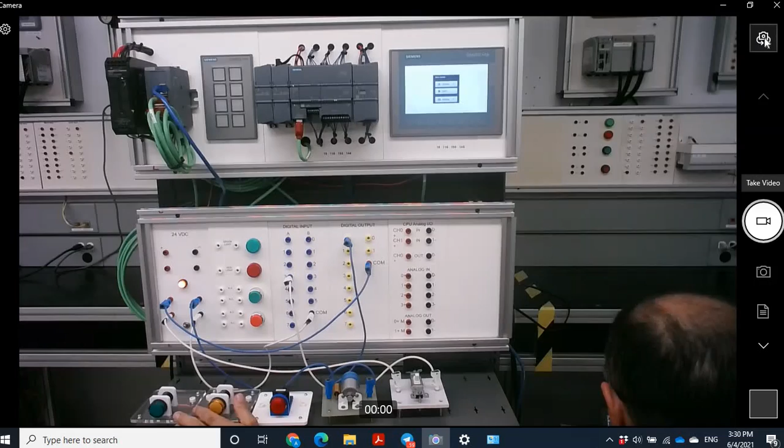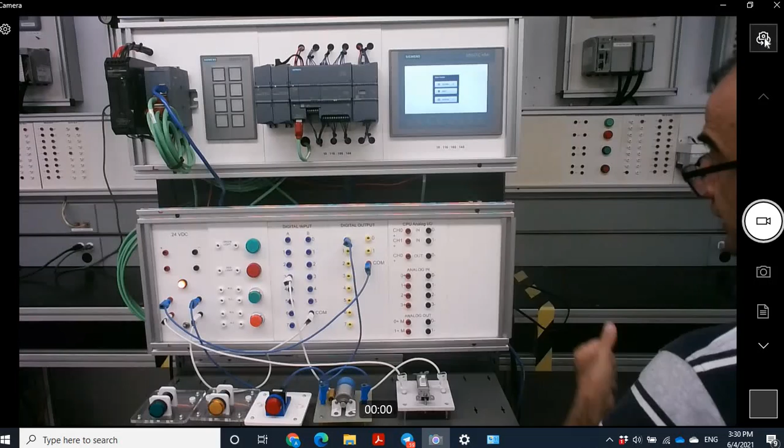And here, let me show you. Here also you see that we don't need these pilot lights anymore. I removed all the connections. We don't need this start and stop. We are going to move everything to the HMI. The only parts that still need to be connected to the PLC are the motor, instead of the heater, and also the switch that senses the temperature, so it's a sensor, and we should keep them here. We cannot replace that. So the wiring simplifies to this one. But all the communication with the PLC from the operator and also the indicators are going to be replaced by the HMI. Okay, so let's again start from scratch.

TIA, again, as administrator. Okay, create a new project. I'm not going to use the previous project, I'm going to build a new project. So let's call that heater control, and put HMI after that to indicate that it is HMI. The version, the user and everything, and then create this. We have already done that, so I'll go through it very fast to introduce the PLC just as practice, without much explanation.

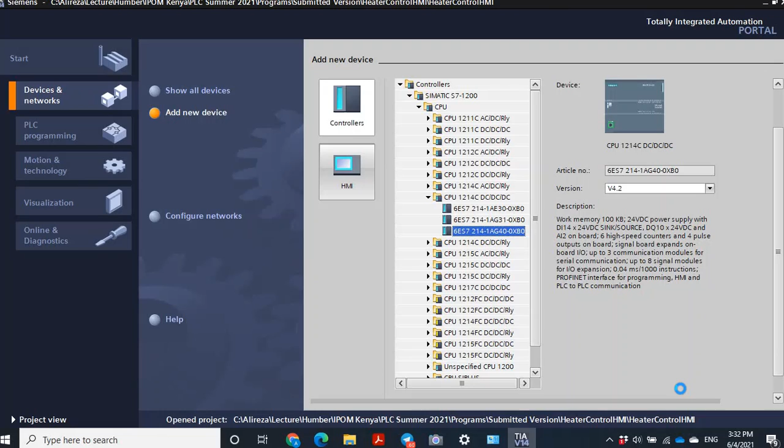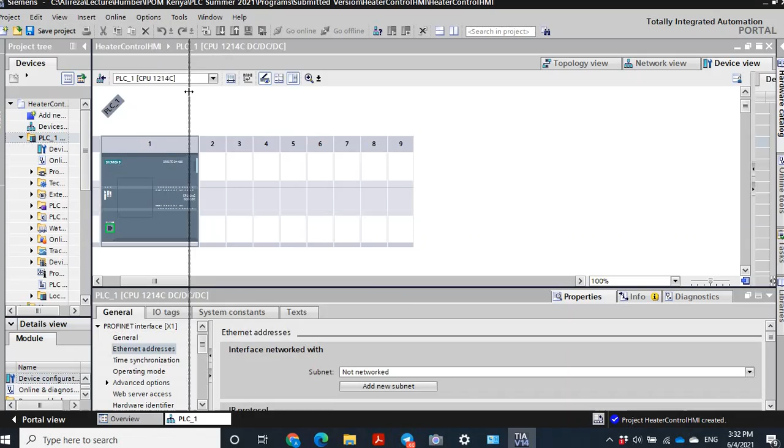Add a new device, so the CPU, then in this directory, this is the CPU that I have here, and add that. But this time we are also going to add the HMI. Let's see, when the PLC has been added, then, just a moment. Okay. We studied in lecture 2 how to add the HMI, but let me explain it again. There are two ways. One way is to use add new device. The other way is to go to the portal view. This time I return to the portal view, this familiar view.

Select the HMI. Here the display is 7 inches, it's a basic type, and the one that we have is this one. And the version of the software that I'm going to use is this one. So add that. Okay. Then, regarding the HMI, it asks whether it's going to be connected to a PLC. Yes, let's connect that to our PLC, and then click on this icon.

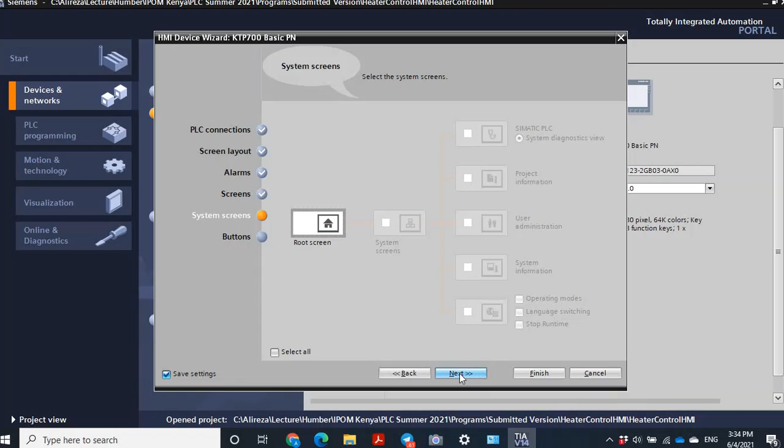Okay, then next. If there are any selections regarding the header, I recommend removing them. We don't need any header in our HMI. Also, anything regarding alarms, we don't need that. We don't need to add any further screens, so everything is in the root screen. We will practice how to add other screens to the HMI, but in this example just the root screen, so everything is fine, and then finish.

Okay, so right now we have the screen, the HMI. Let me zoom out. Okay, this is the HMI screen where we can build our HMI. The HMI that we are going to build is this HMI, so we need a start and stop push button, so we need 2 switches, and also some boxes to color, some lines just to indicate that it is a heater, and also a switch and something to switch.

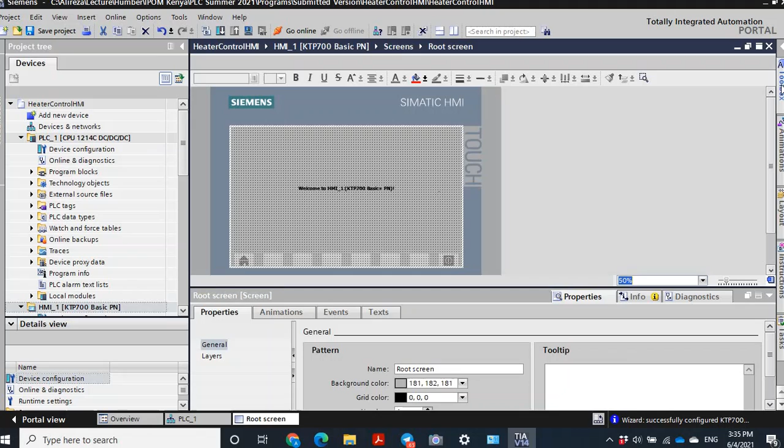All of these are built based on some basic elements. All these basic elements are available in your HMI here. Okay, here in this HMI window, if you click on the toolbox here, you see all the elements that are available. So we have these elements. These are very simple elements, but by combining them, we can build some complex elements. We're going to use these to build the elements, and also there are some basic objects and elements to build.

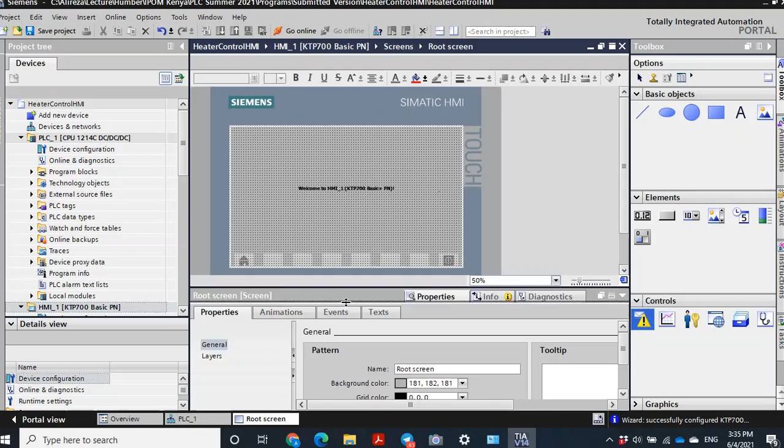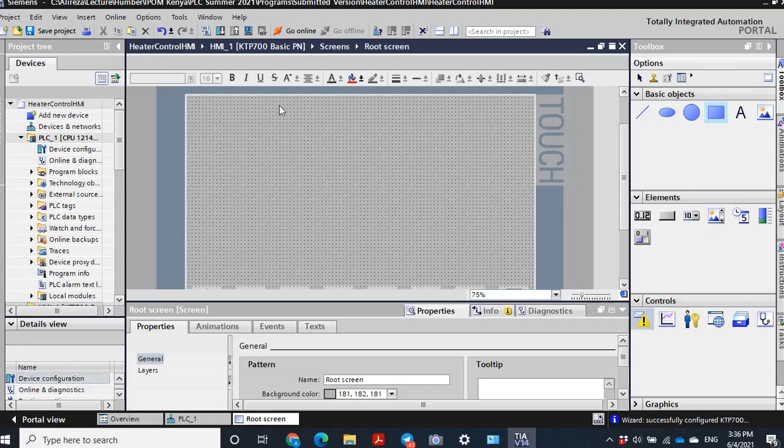Okay, so let's start with the very simple one, this one, the heater. It's just a rectangle, so I need a rectangle. Here is the rectangle. Okay, let me just increase the size a little bit. Okay, no, it's too much. Okay, this. We don't need this welcome message. You can simply select and remove that. Okay. So a rectangle, let's add a rectangle here. Okay, we can adjust the size of that.

Here there is some information regarding that, regarding the color of that, the color of the border, the color of the background, also the layout regarding the position of that, the width of that. Some other information, some of which we will use later. And also you can add some animation to that. This is something that we do. Animation is something where we can adjust the color according to whether the heater is on or off.

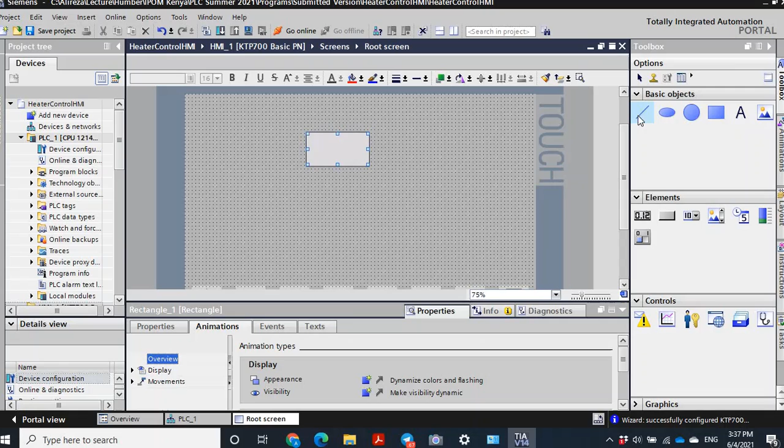Okay, so let's first have this one. Also, this is something that I built by adding some simple lines. It's too much here, but just to save time, I built a few of them. Okay, just a simple line here, and another line from here to here, for example, another line from here to here, and then one from here to here, another one from here to here, and one more from here. And let me just skip to making all the others. You can add any number that you prefer, and try to wrap that up at this point.

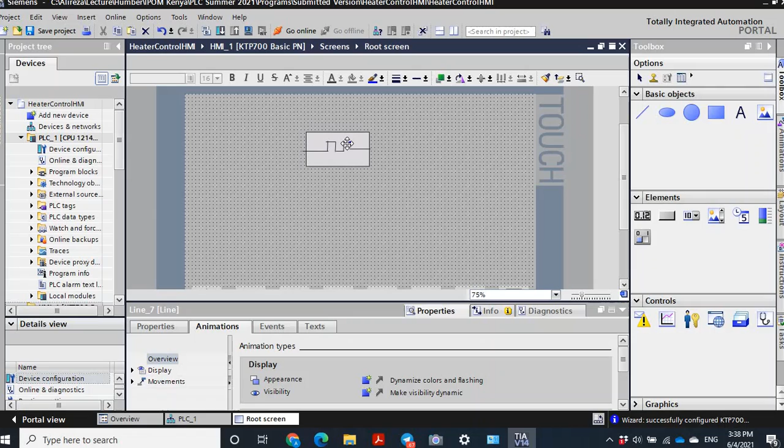Okay, this, and then have a line here, from here to here, and let me increase the size of this one. Okay, and then move all of them a little bit to the right. Okay, this is the heater. It's not that beautiful, I know. You can make it more beautiful, and if I have time I will do that at the end of this session. But anyway, we can change the size of that, for example, in the properties. Let me show you.

In the appearance, you can change the thickness, the width of that. Okay, let me add, for example, like this, or the color of that, the layout regarding the width of that. Let me decrease that, and also I can move the position. You can see here the position is changing, so make it more beautiful. Okay, that's good. And for example, this one also, let me change the appearance of that, increase the size, and also it seems that it's not that straight.

So this is the distance in the x dimension. This is the x dimension, and this is the y dimension. This is axis y, and this is axis x. The value is 1, but it's supposed to be 0 because it's going to be straight. So let me just make it 0, and you see it becomes very beautiful. And then let me decrease the size of that, and also move that downward.

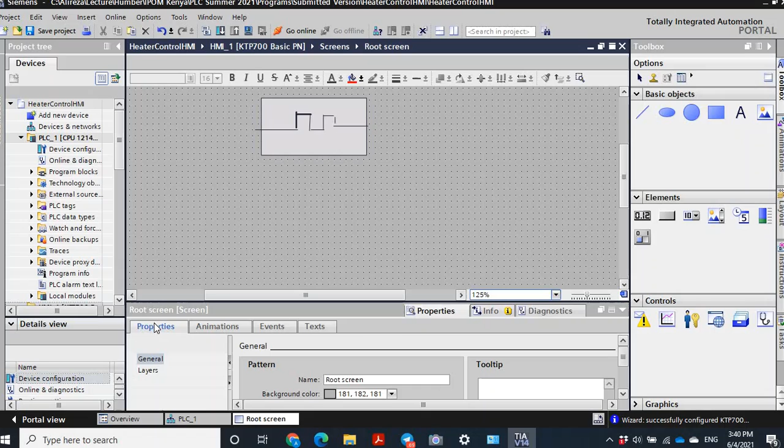Okay, so move that. Sorry, change the position from Y. Okay, you see, that's more beautiful. So you see that you can make it more beautiful. I skip this part, and if you have enough time at the end of this session, I make it more beautiful. But this works for us sufficiently.

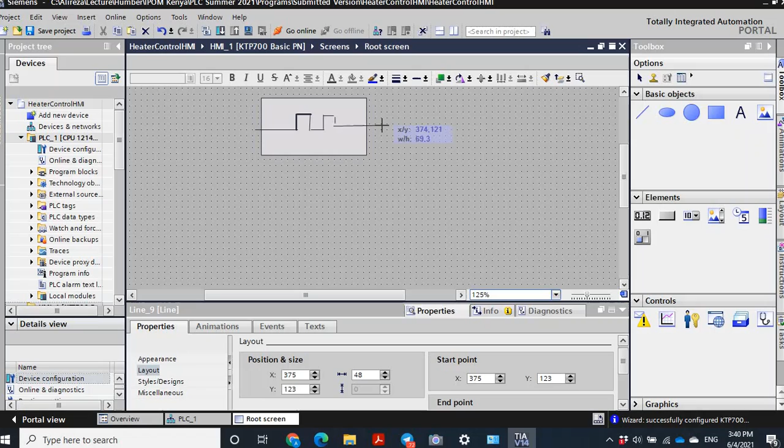This shows that it is the heater. Just change the style of this one, increase this one, and then also let me check the layout of that. Yeah, 0, so it is quite straight. A little bit to left. That's good. And this one also, just this one.

Again, the appearance of that, increase the width of that, make it more thick, and then the position from the X, let's move that a little bit to left. And you can also increase the size of that, okay? And move that to left. That's good, beautiful. Okay, so this is our heater.

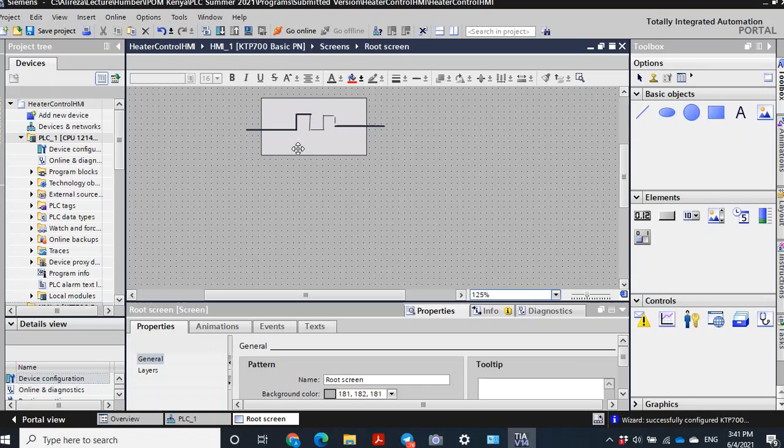The heater is going to turn on and off to indicate whether the heater is on and off. So to do that, you can change the color of that, depending on the state. According to the original program, if the heater is off, the color should be green, and if the heater is on, the color should be red. So instead of the red and green pilot lights, we are going to use the HMI. So let me change this in the HMI.

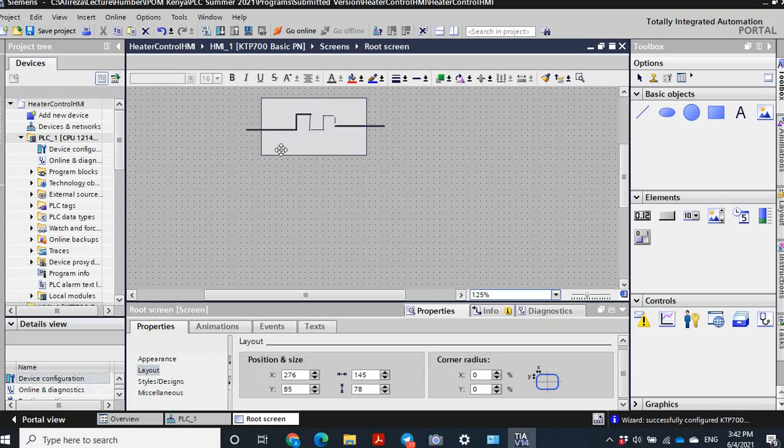How to do that? Okay. Here we have an animation. For this box, first select the rectangle, and here we have the animation. We can change the color of that in this animation. But before doing that, we need to build the program. We need to have this program, and when we have this program, we have these variables, and when we have these variables, we can change the color according to these variables.

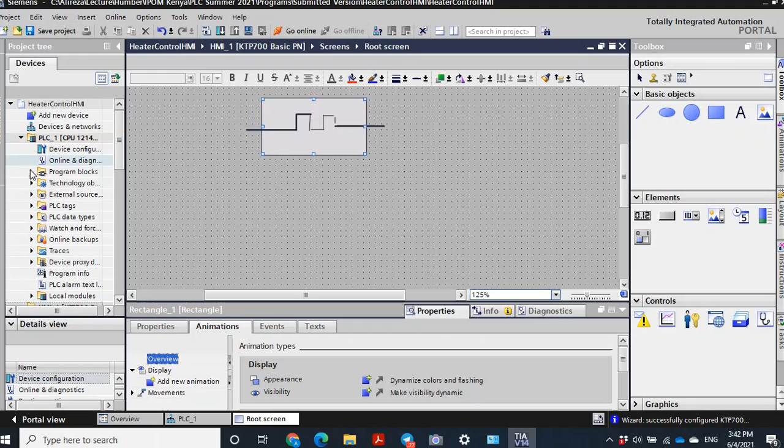So before continuing the HMI and the other parts, let's first build this program and then use the variable addresses and the tag numbers of these PLC programs in our HMI to turn on and off or change the color of them. So let's go back to the program block, the main, and simply build the program. We have not yet established the connection between the PLC and the software completely. I can do that later. Just build the program, and then let's set up the configuration.

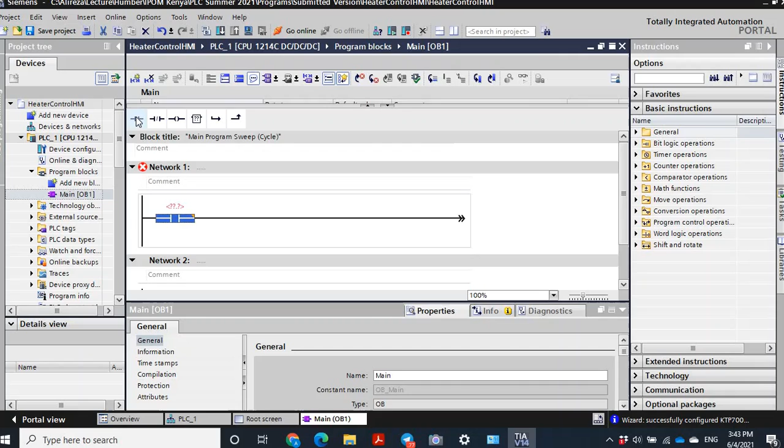So we need here 2, 3, okay, and one output, and here similarly we need a branch with this one. In the previous part we just dragged that to this point. This time I'm going to use this option. If you click on that, you see that it connects to the closest position upward. So here, okay, regarding the inputs,

in the original program we had input number 1 and 0 because there were 2 physical hardware switches that should be connected to the PLC through the inputs. But this time we're going to use the HMI as the push button for the start and stop. So we don't need to use inputs because these are not devices outside of the control system to be connected. So instead of that, we use the bit memory M1.0 and M1.1 for start and stop.

So let me use the same as it was here, 1.0 and 1.1 for start and stop. Okay, so it should be M1.0, and change this to stop. See, there's not any input. You can change, and here it is M1.1, and this is supposed to be start. Start. And this is for overheat.

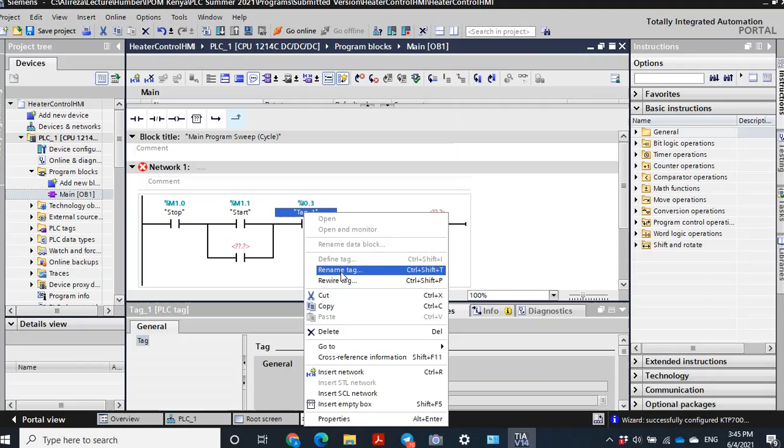Overheat is a sensor connected to the input 0.3. So we should keep that. And then this should be overheat. Okay. And this is the heater. Again, we have a physical device outside, Q0.0, and then this would be heater. Okay, and again this is heater. Okay, so the program is ready. This is the only program that we need.

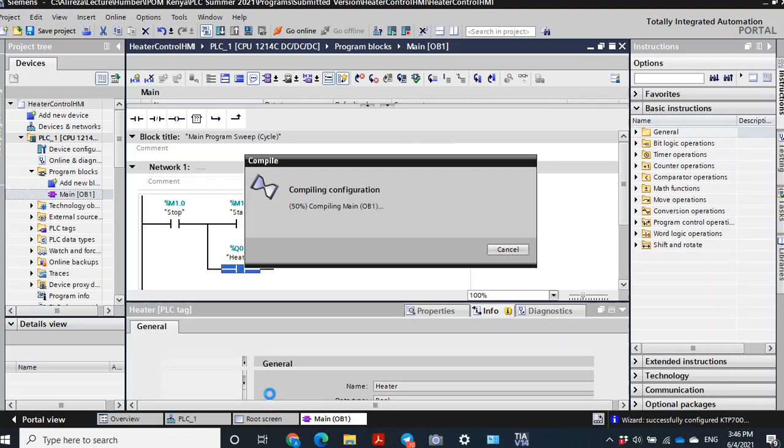Let me first compile that to be sure there's not any error. Okay, see here, there's not any error. So then let's download. This time it asks which PLC, and then I can set up the communication with the PLC. Okay, this is the IP. This is the PLC that right now I have in my software.

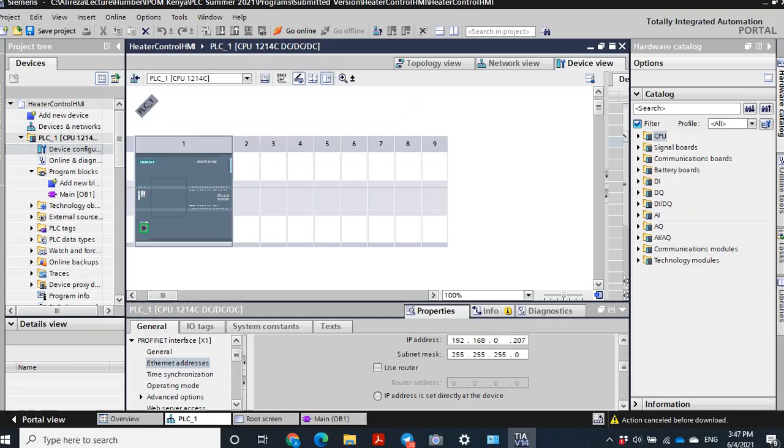You see that the address is not 207 because I didn't change that. So let me go back and configure the device from here. If you double click on this device configuration, this opens, and then if you double click on the PLC, the properties of the PLC open. Under the Profinet Ethernet address, go down to see, okay, this was the one that we had, 207. It should be 207. Okay, apply that, and then again try to download.

You see that this time the address is as it is given in the software, and then we can search for any available or compatible devices. Okay, yeah, this is the PLC that we have in the trainer. The address is this one, and then we can continue, select that. It has already been selected, so download that, load that.

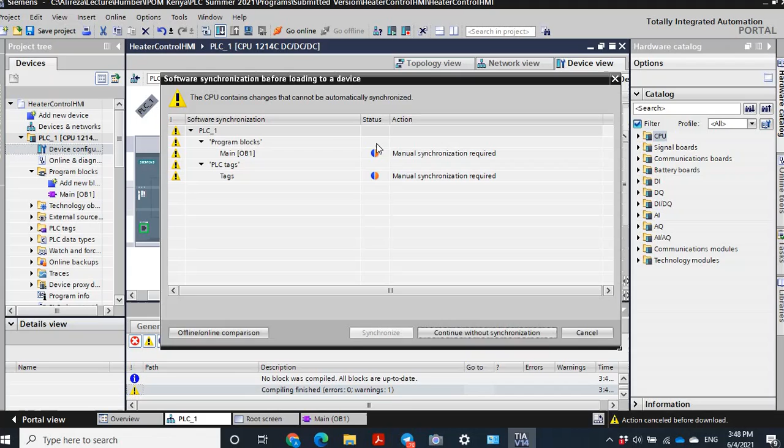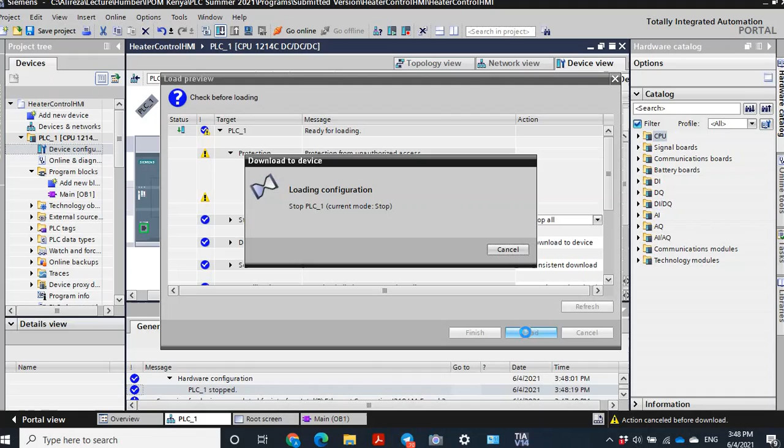Okay, again, it reached this point, continue without synchronization. And then again, it should be in the stop mode to change the program. So stop that, because the PLC right now is in the run mode. And then load. Okay, and then start that. Okay, so the program is there, but there's not any indicator there. And we should continue right now that the program is ready.

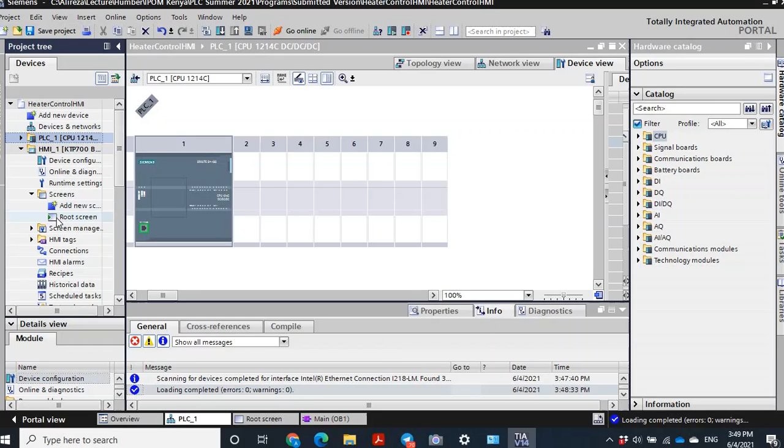We have all the addresses that we need in the HMI, so we can go back to the HMI. Please notice the HMI. So this is for the PLC. Let me close these branches for the PLC, and instead the HMI. Under HMI, under the screens, the root screen. Okay, double click on that. And this is the screen that you just put.

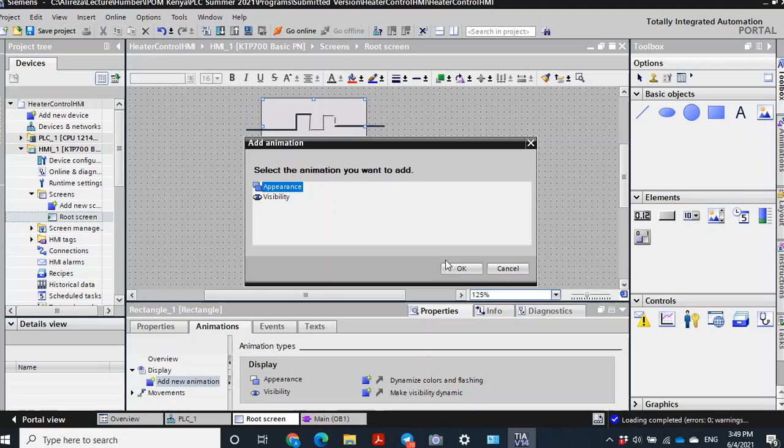Okay, so select the rectangle. And then we can go to the animation, and here we have display, and add a new animation. Something that we want is to change the appearance of that, let's say the color of that. Visibility is whether it will be visible or invisible, but we don't want to make it invisible. We just want to change the color, so click on appearance. Then let me drag it up so you can see more detail.

The tag: it's going to change the appearance according to the heater. So when you click here, it asks you the tag or the addresses under the PLC. Under the PLC, find the PLC tags. If you click on this and the default tags, then you see, increase the size of that, all the tags that we have already defined in our PLC. In the PLC, we have input 3 for the overheat, Q0.0 for the heater, and these two memory bits that we are going to use as start and stop.

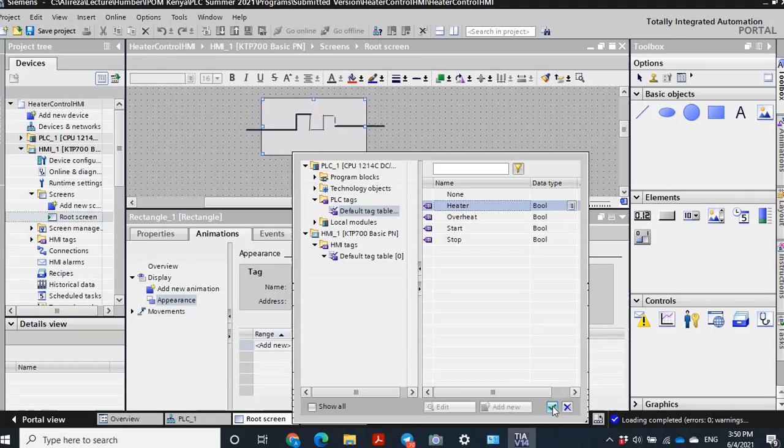So the color of this indicator for the heater is going to change according to the state of the heater command. If the heater command is 1, it's supposed to be red. If it is 0, it's supposed to be green. So let's select that. When you select that, it appears here. Then here you can add a condition. Here, the heater, the state of that, 0.

When the command of the heater Q0.0 is 0, it means that the heater is off. In that case, you remember that the color is supposed to be green. So let me select green for that. Then add new, and by default, because heater is just a bit, it has just two states, state 0 and state 1, and it automatically shows us state 1, but you can also change that if you have other types of variables.

Of course, for this one you have just state 0 and state 1, and when the heater is 1, it means that we have the command for the heater to be on, and in that case, remember that the color should be red. So let's select the color to be red.

Okay, good. So it means that the background color of this box changes from green to red depending on whether the heater is on or off. Okay, we will continue with the rest.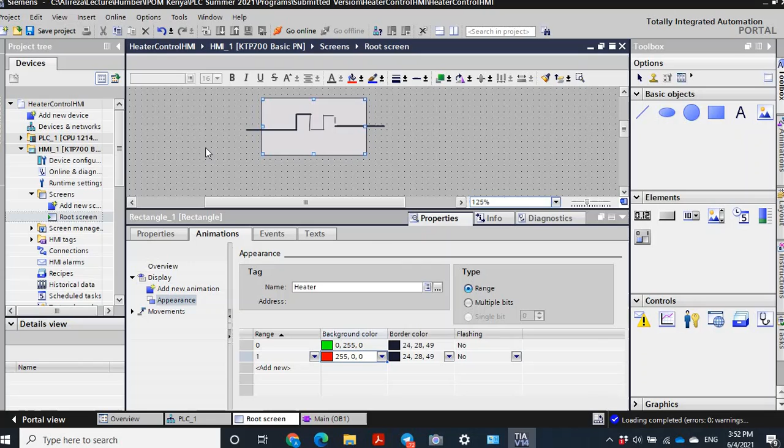We need a start and a stop. So let me add the start and stop. For the start and stop, here we have some elements. The one that we need is this one, button. It is something that we can use as a button. So let me bring one here, and one more here, one for start and the other for stop.

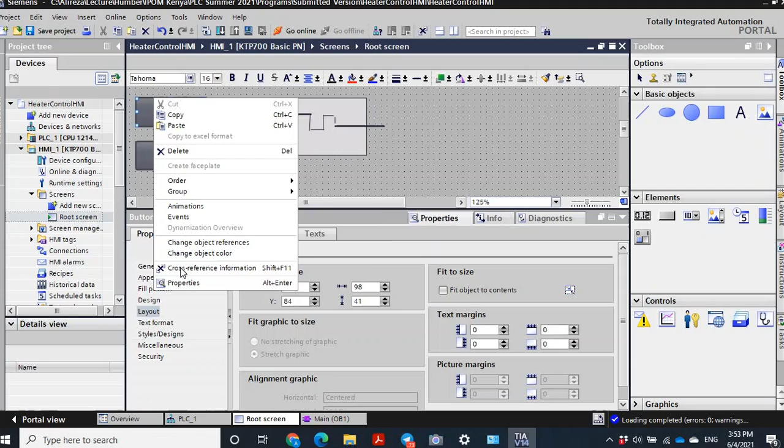Again, you can change the properties of that. Double click; if the properties appear, that's fine. If it doesn't appear, just right click and then properties. Okay, so it appears. The text that we want to have here is start and stop. So first, this is supposed to be a start.

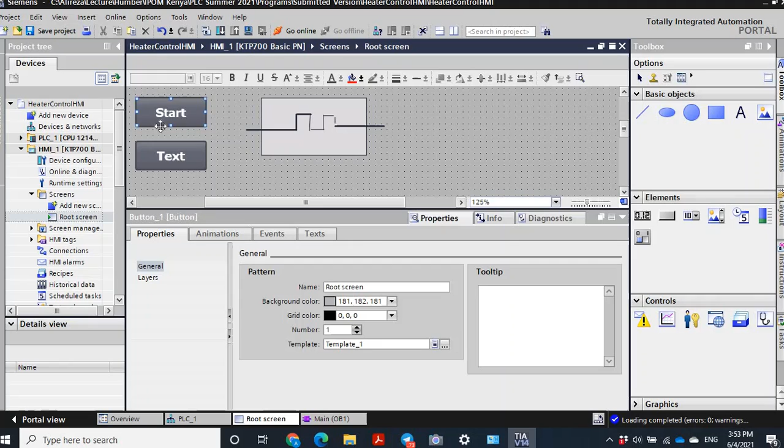But instead of the input, that memory address is going to change. So memory address M1.1 is going to change when we press this push button. It's supposed to become 1, and when we release that, it's supposed to become 0. This is something that we can build here by using the event. Select press, and then add function.

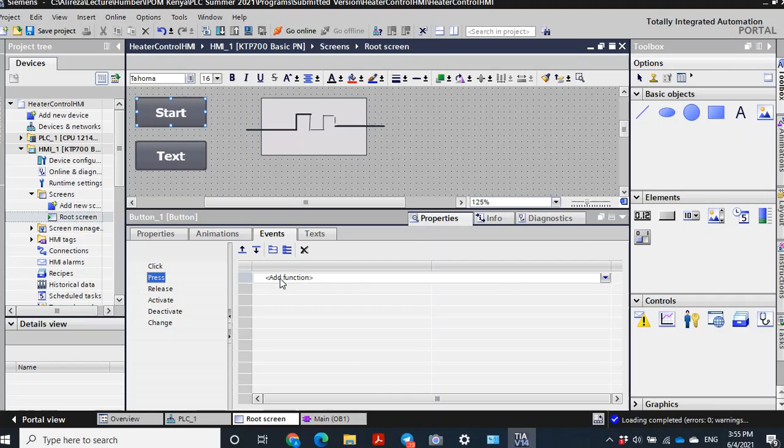Something that we expect is this edit bits. There are many options. We are not going to go through all the details; we'll work with some of them during this program, but not for this specific one. So here, set the bit. When we press that, we expect that we set the bit. Which bit?

If you click on that, it opens. By default, it shows you the tags in the HMI, but we don't have that tag in the HMI yet. The one that we are looking for is this start, M1.1. So select that. It means that when you press this start, the start tag M1.1 sets to 1.

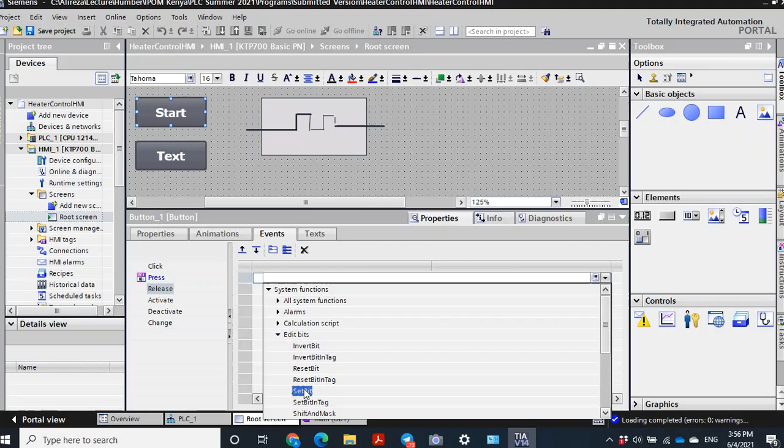And then when you release that, the push button state should return to 0. So again, add the function, but this time the function that we need is reset. Under edit bits, the reset bit. Click on reset bit, and then here again, select the start.

So it means that when you push this button in the HMI, memory M1.1 becomes 1, and when you release it, it becomes 0. It is similar to a physical push button. When you push that, the state of this input becomes 1, so the state of start becomes 1. When you release it, it becomes 0. That is exactly the function of a hardwired push button. Similarly, here we have it for the HMI push button.

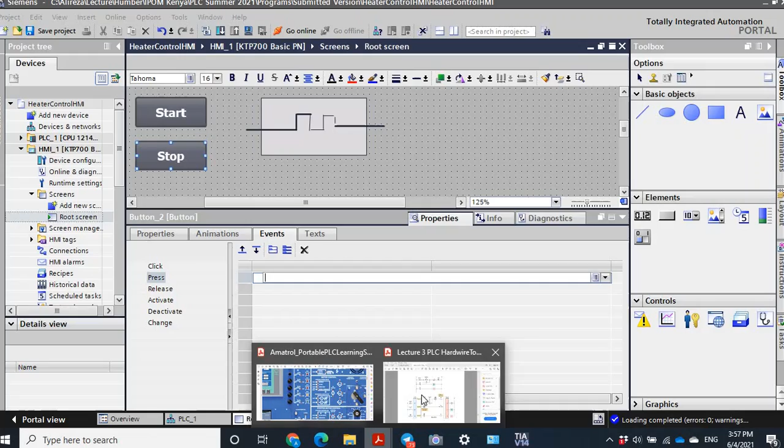And this is something that we expect from the HMI push button. So this time, when we push that, we expect to reset which bit? The bit that represents, sorry, represents the stop. In the PLC tags, the stop, okay? Increase the size so you can see, okay, yeah.

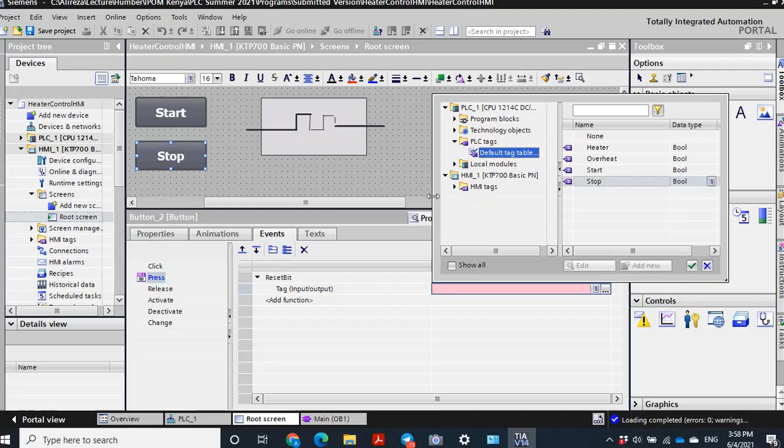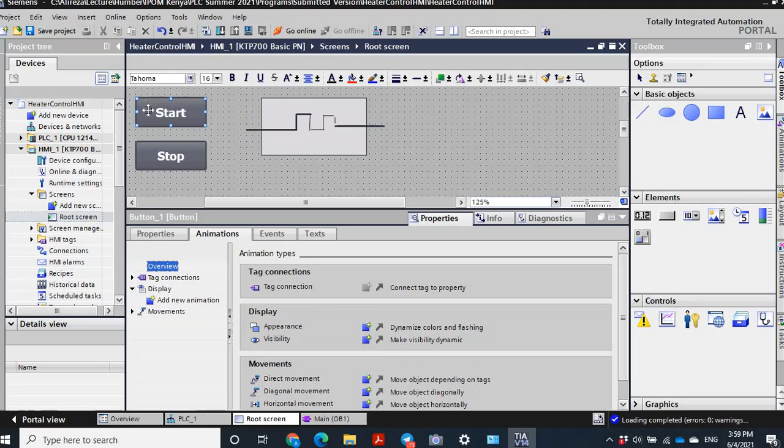I want to also change the color, so under display add a new animation, similarly appearance. This time again the tag is the start. The color is going to change with the start tag, and add new when this is 0. So before pushing, I just use, let's say, this dark green, okay.

And when you push that, the state of the start memory becomes 1. When we push the start, the state of this memory becomes 1, and when this is pushed, I want to make it very light green, okay.

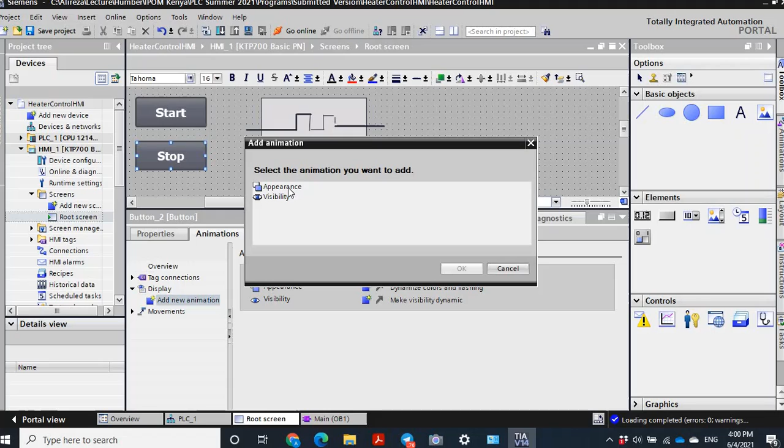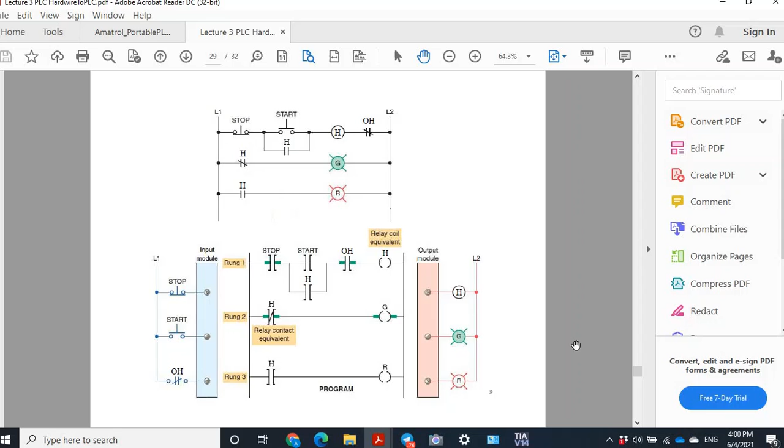Similarly for this one. Again under the display, add a new animation, and this time again appearance. This is connected to the stop. I connect the color of that to the stop, and then if this is 0, it means that you pushed it. The state of this stop bit is 0, then we pushed the stop.

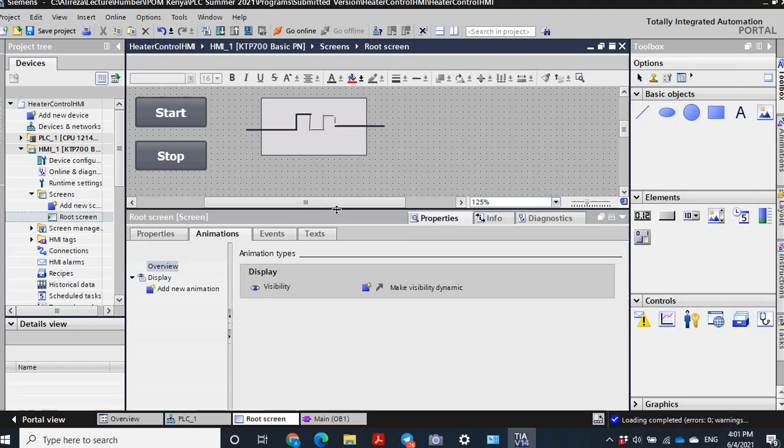And in that case, I want to have a light red here. So when it is 0, you select this light red. And when it is 1, it means that it is in release mode, let's select a dark red. Okay, so by pushing and releasing that, this turns on and off. So up to this point, let's download that. It's not yet finished, but just look at the intermediate result, and then continue building that.

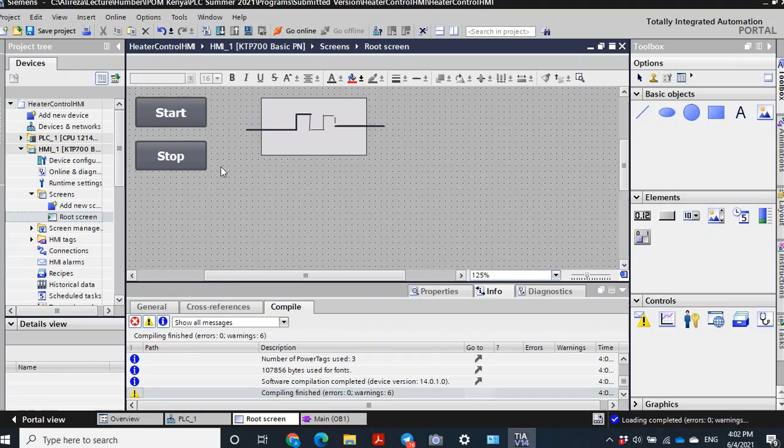So let's download that. First we should compile it. Click again on compile to be sure that there's not any error. You see, here it indicates 0 errors. There are some warnings, don't worry about them. Then download that. When we try to download, it asks which HMI, and because we didn't set any IP for the HMI in the software, the default value is this. So let me cancel that.

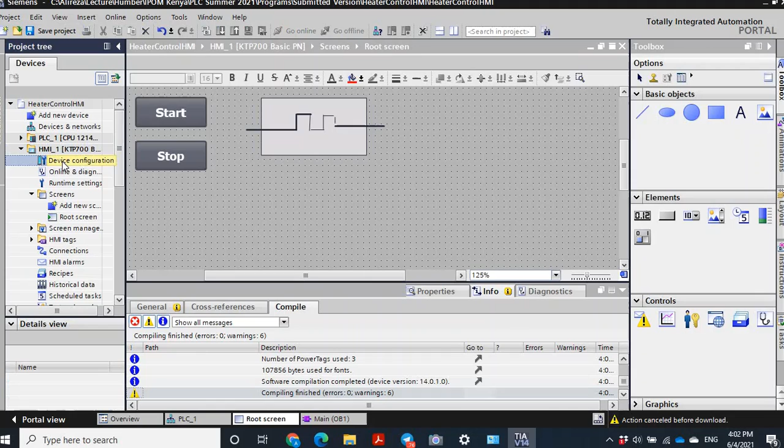Under the HMI, double click on device configuration. Okay, the HMI appears. Double click on the HMI, and here are the properties of the HMI. Under the Profinet interface, Ethernet address, go down and find this. 192.168.0.2, but this is supposed to be 205. Okay, so I set an IP for my HMI.

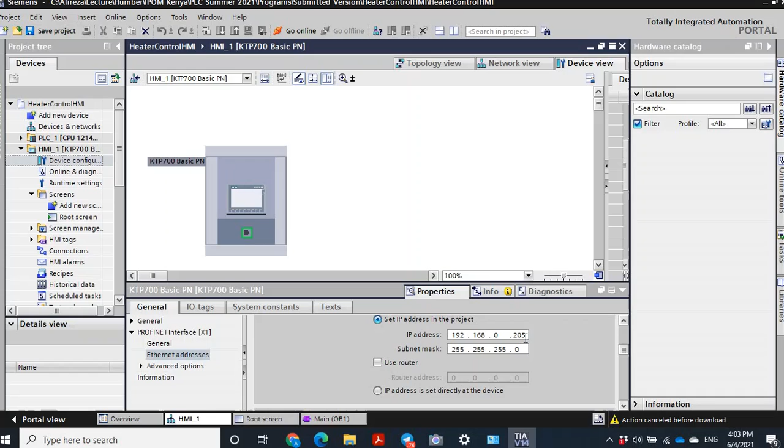It is in this software. It is not yet in the HMI. Of course, the HMI has also the same IP, but anyway, it is not yet defined in the HMI. It is just defined in the software. Then again, let me select the HMI and download that.

This time, you see, it mentions it. So instead of compatible, use the option with exactly the same address. If the address is exactly the same, it will be indicated here. Start search. Okay. Yes, it is here. So load on that.

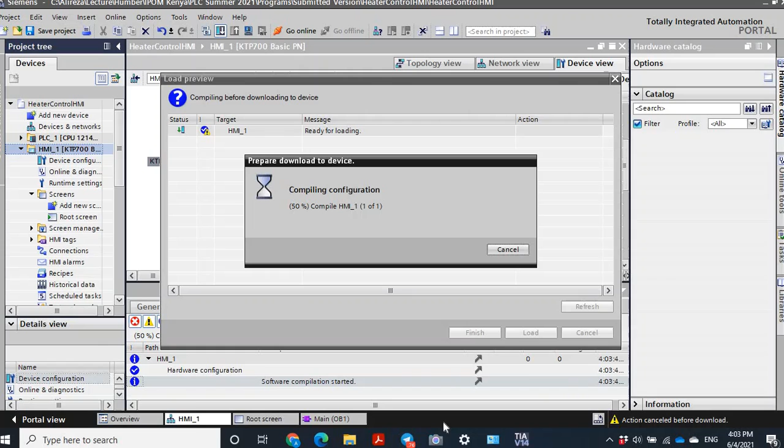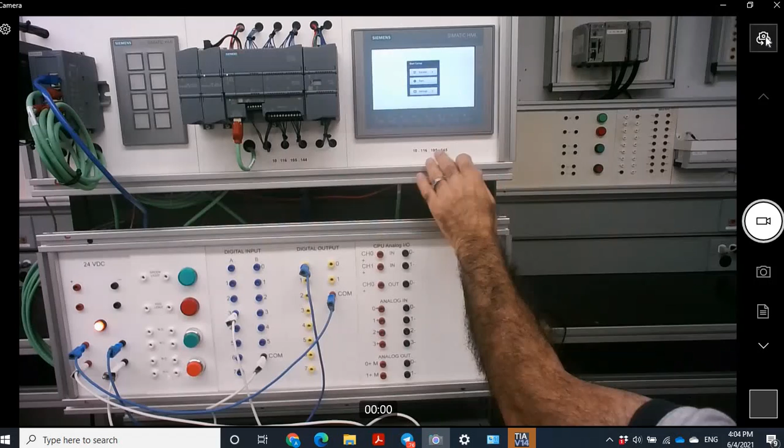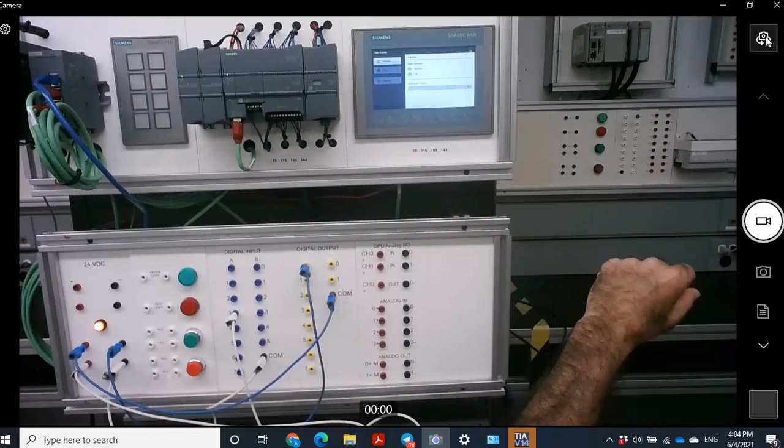Okay, this is the HMI. Before going through the detail, let me show you something here. It's a little bit closer to that. On the HMI, in the home screen, you have transfer, start, and setting. Start means that it goes to the HMI that has already been downloaded. Under the setting, there are some options that we will look at in the second lecture. And transfer is the one where you can see whether the transfer is correct or not. So let me select this part and then continue downloading.

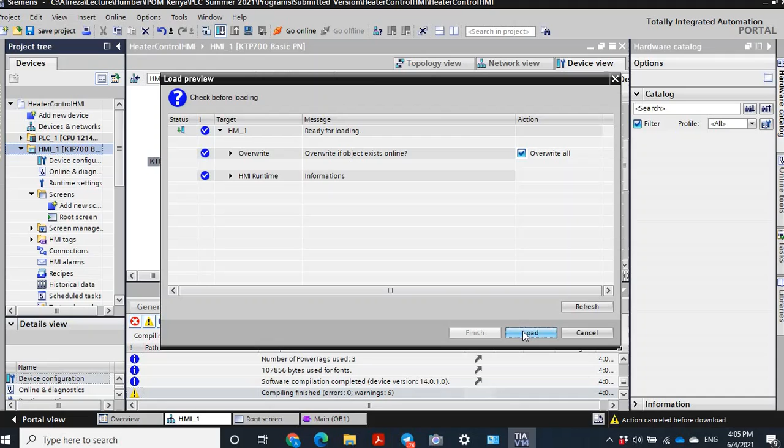During the download, it asks whether I want to overwrite the HMI on this HMI device, because some HMI has already been downloaded on it, but I want to overwrite it with my own HMI. So click on overwrite and then load. Sorry, didn't see that. Okay, so this is the simple HMI that we built. This is the start, this is the stop, and this is green.

And right now, the light for this is green. It's not possible to go any closer. This is better. So here you see the start and the stop. They are in green and red, and this is also in green. So let me push the start. See that the color for the start becomes green, but the heater doesn't turn on. So it means that there's something wrong.

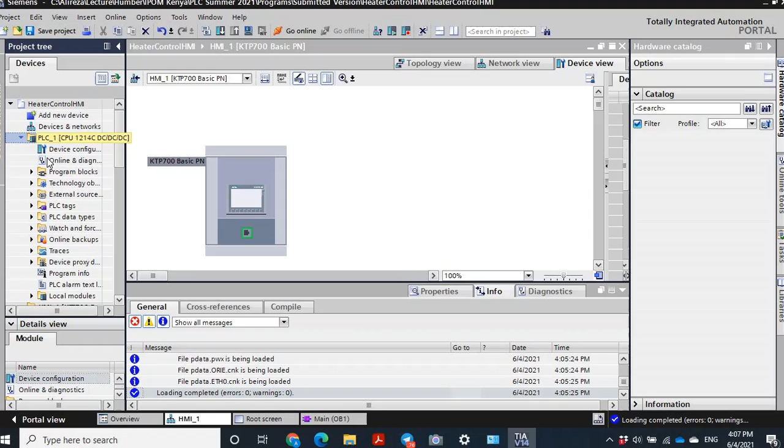To investigate that, let's look at the PLC program. In the PLC program, let's monitor the state of the switches here. You see that the stop is on, that's good. The start is off. And when I push this, this turns on. So the problem is on the overheat. The overheat switch is open. It looks like there's an overheat.

So let me change the state and show you here. This switch, in fact, is off. So let me turn it on. When I turn it on, you see that it becomes green. So there's not any overheat. And then if I push the start, you can hear the motor is on. It's turning. And also you see that the heater indicates that it is on, it is red. So instead of having a pilot light for indicating the state of the heater, you can indicate that on the HMI. You don't need any wire.

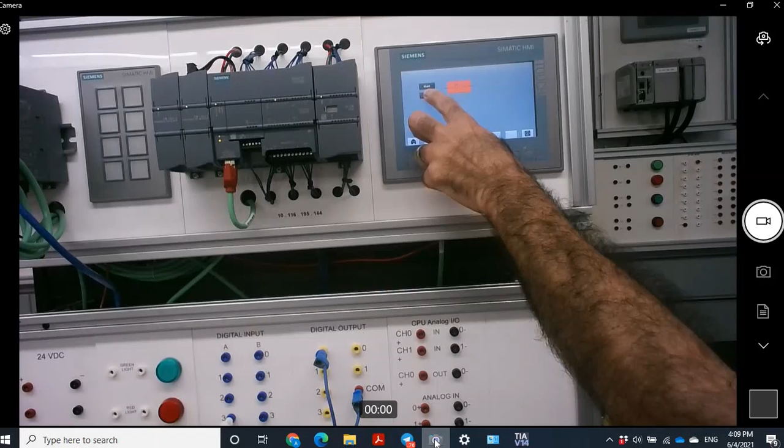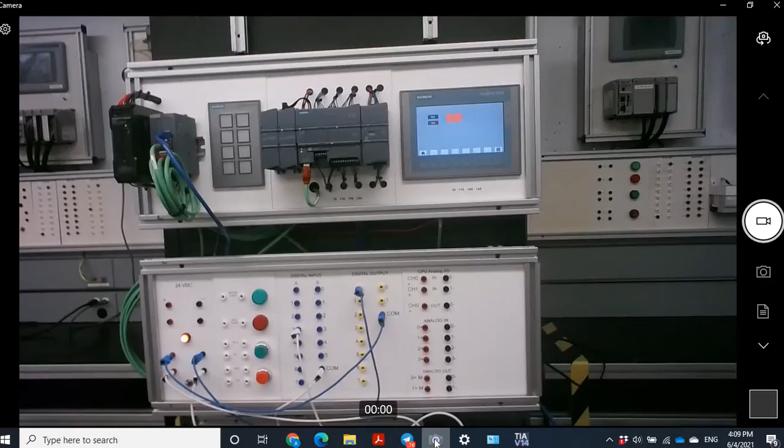Let me stop that. And again, start that. Adjust this a little bit. So you have the motor, you have the overheat, start, and this is the indicator for the heater. So, start. Okay, so you see.

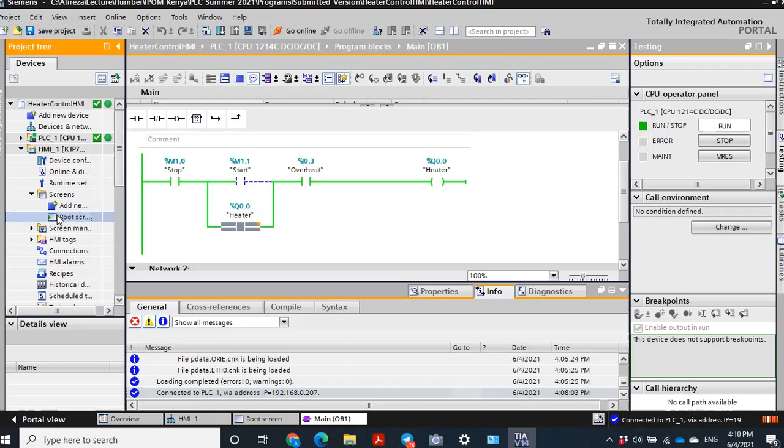But we want to continue to improve this HMI. So let's go back to the HMI. It works well, but it's not yet complete. Something that we need is an indicator for the state of this switch, the sensor. So let's build this part also. To do that, I just add a small circle here to indicate the switch, and set its appearance: the fill pattern color to be black.

Another one of these: I can Control C and Control V, just copy that. So these two dots, and then the line here, just to indicate that this is connected down, and increase the width of that. That's sufficient. This is the switch. The switch has one line from here to this point.

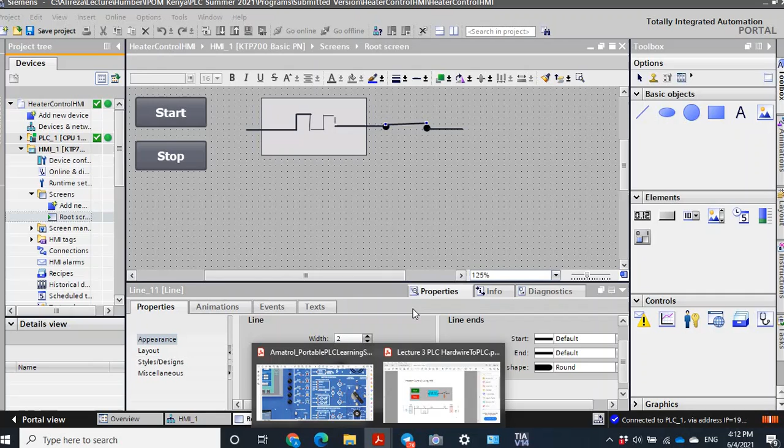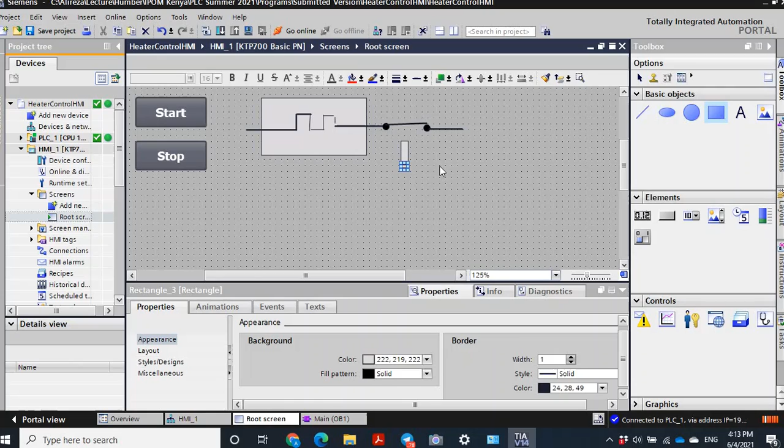And then to build this part, this sensor shape, I add 3 rectangles, one for this center one and 2 for these small ones, and a line here. Okay, so let me add a small rectangle here, long one, and one more rectangle here, and one more rectangle here. Okay.

Let's increase the size. You see they are not that beautiful, so I just select this, and then in the layout we need to increase the width of that. Oh, too much, just 1 point, yeah, sufficient. And also move that a little bit upward by changing the y-axis, oh, it connected. Similarly for this one, let's use the same 11 by 5, so use the same for this one also, 11 by 5.

But also I should move that a little bit to the right up, not too much, and a little bit down. Yeah, it's connected. So these are connected. Then I need also a line from here to here to indicate that this is a sensor switch. And a little bit to the left. So that's beautiful. Everything is here.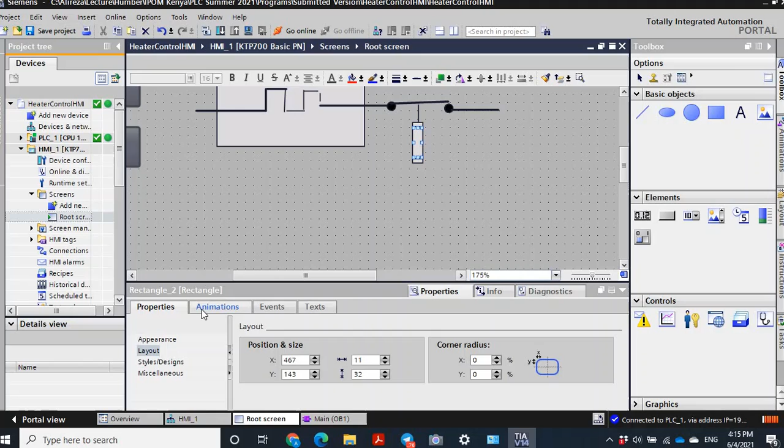The color of this center rectangle is going to be changed. We assume that if there's not any overheat, the color is going to be light yellow, or maybe let's keep it gray, and when there's an overheat, change this color to orange. So this time I select this rectangle, and then in the animation, add a new animation, double click on that, select appearance, we are going to change the color of that, and the color is going to be changed according to the overheat. So under the PLC tag, select the overheat.

Please notice the overheat is a normally closed switch. So in normal state, when there's not overheat, the switch is closed. Let me show you again here. When there's not any overheat, the switch is closed. This dash shows that it is normally closed. It means that in normal state, when there's not overheat, it's going to sense the overheat. So if there's not any overheat, this is closed.

So when the state of this switch is 1, there's not any overheat, and when the overheat happens, the state of this input becomes 0. When there is an overheat, we expect the color to change to orange. But if there's not any overheat, when the state is 1, we expect the color to be gray. But let's use a little bit darker gray, like this. So it is dark gray when there's not any overheat, and the color is orange when there is overheat.

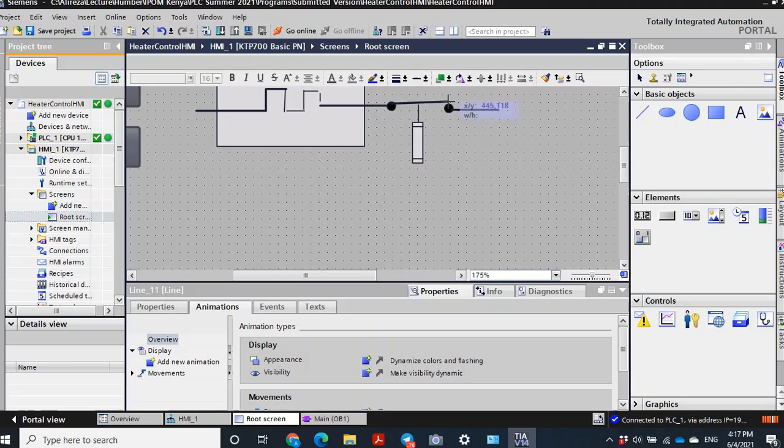But in addition, we want to indicate that in this switch. Here you see that the switch is connected. Let me just bring it down a little bit, oops, sorry, it is connected. Yeah, this is better. This is closed. But something that we want to show to the operator is that when there's an overheat, the switch opens like this. Here when there's an overheat, this is orange, and also the switch opens.

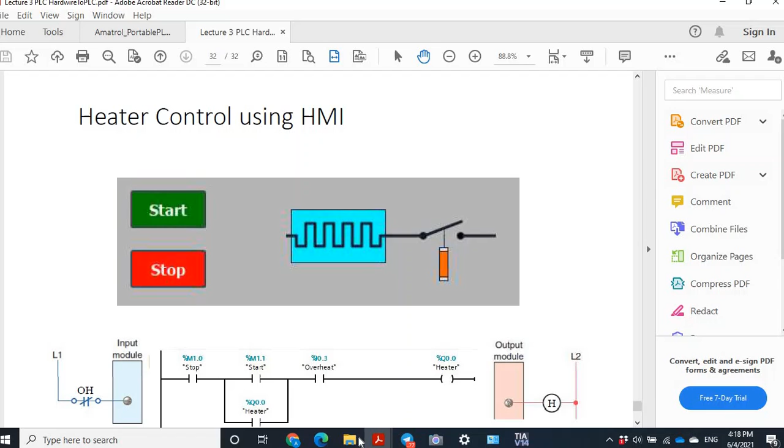How to do that? In fact, we don't have the option to rotate the line in these PLC HMI basic objects, but we have another option. The option is that we can have another line here. Let me add another line here. Good. And also let me increase the width of that, so the appearance is the same.

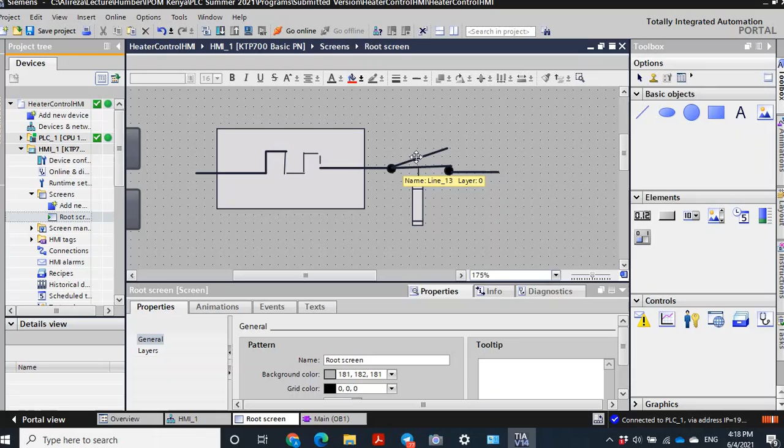Now we have two lines. This line is going to be visible when there's not overheat, and when there's overheat, we can make it invisible. And this one, opposite. When there's overheat, this is visible, and when there's not overheat, it is invisible.

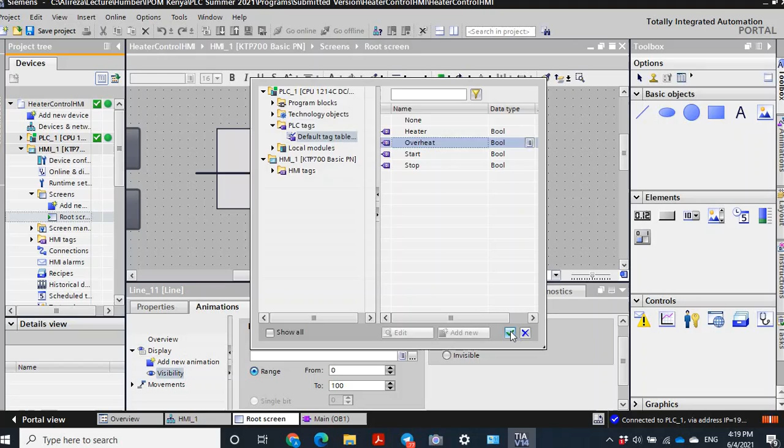To do that, let's select this one, for example, and then in the animation, again add a new animation, and use visibility. And then again, it depends on the tag, the overheat. What we expect is that it is visible.

See that you have two options, visible and invisible, both of them. It's going to be visible if there is not any overheat. When there's not any overheat, the state of this overheat variable is 1. So when it is 1, from 1 to 1, it gives you more range, because here we have just a bit. It is a bit, just two states, 0 and 1.

But later we will study analog signals and word variables, then there's a range on them. So you can also have some range. In some range it is visible, in some range it is invisible. But in this switch, the state of the overheat is just a bit. The state of that is 0 or 1. When this is 1, it is visible. Otherwise it is invisible. For the other one, it is opposite.

So let me add an animation to that. This time, visibility is opposite. So again, select visibility, and then again the visibility is going to be changed according to the overheat. So this time, it is going to be visible when there's overheat. When there's overheat, the overheat input variable is 0. So when it is 0, it's going to be visible.

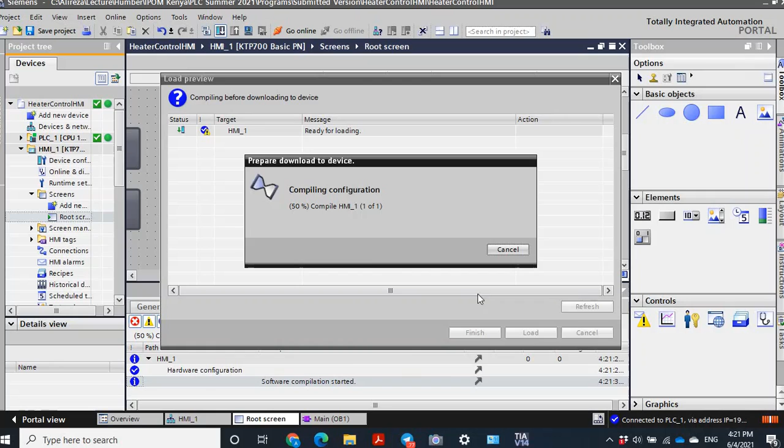And then there's one more minor change, but let me leave that to final tuning of the HMI. Let's download this and see the effect of that, and then do some minor improvement on the HMI. So this time again, there's not any error, and download that. Let me download. Just a moment. Again, overwrite, yes, because we are going to change that. Load, and then okay.

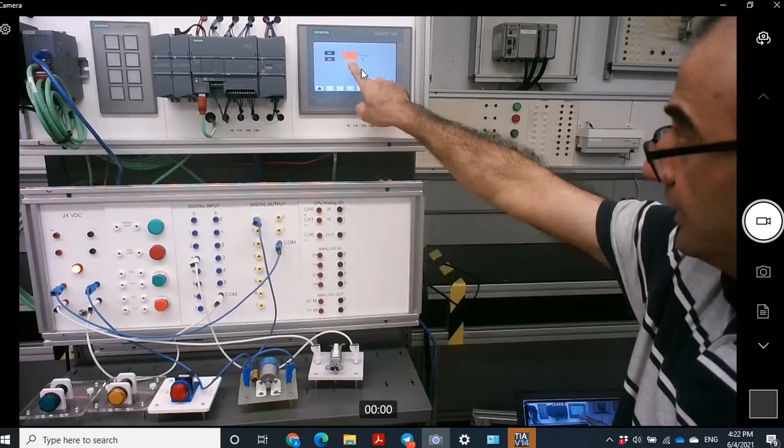Look at here. This transfer menu opens and shows if there's any error. And here, you see that the switch is also added, and this time let's again run the program. So let me start that. Again the heater turns on, and it is indicated right here. Then I stop that. It is green. The overheat switch is closed. It means that there's not any overheat, and you see that the color of this one is also gray.

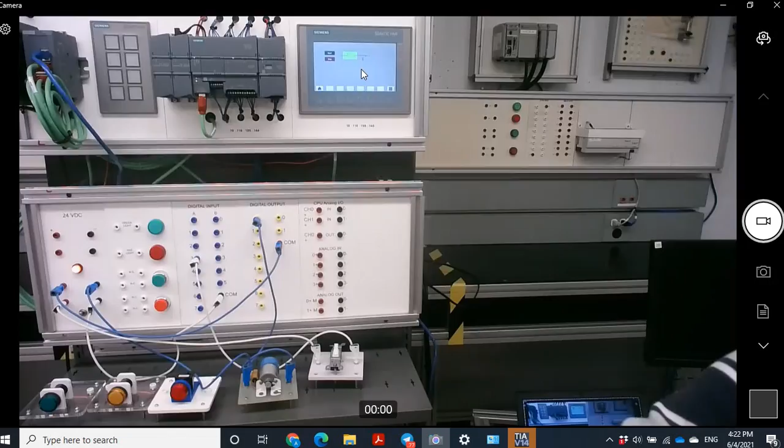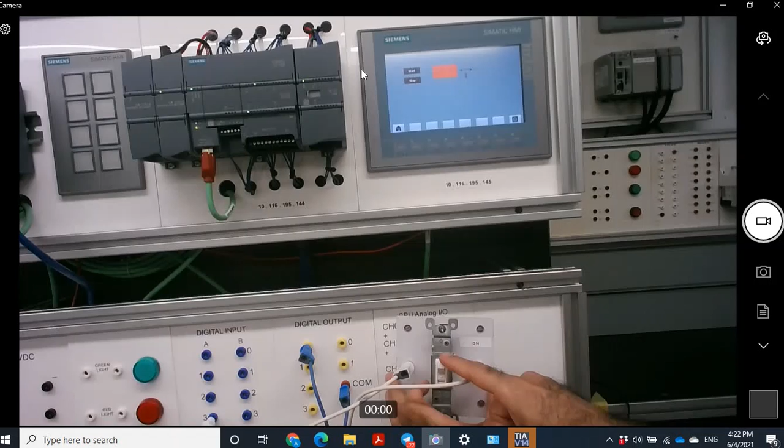It is here, and then again start. And this time, let's assume that overheat happens. So let me switch this off as if overheat happens. You see that the color changed to orange. I hope this is clear. And the switch also indicates that it is on. And when the temperature reduces, the heater turns off. So we expect the temperature reduces after some time.

When the temperature reduces, it drops to less than the switch temperature limit, and then this turns on. You see that? It shows that there's not any overheat, both on the color of the sensor and also on the switch. So see, this shows overheat, and this doesn't. It shows that there's not any overheat.

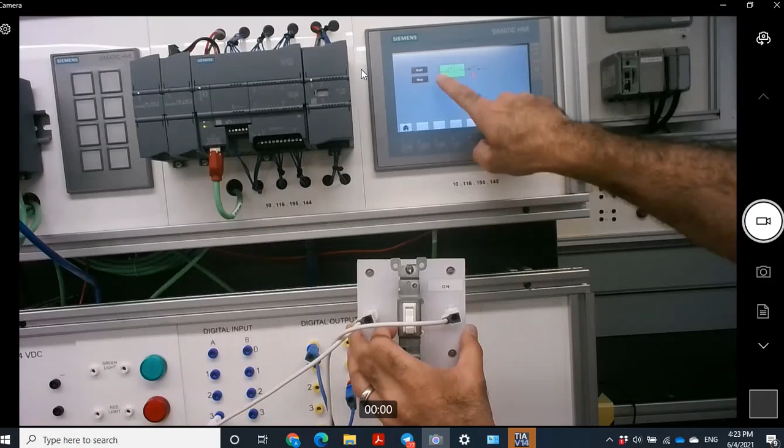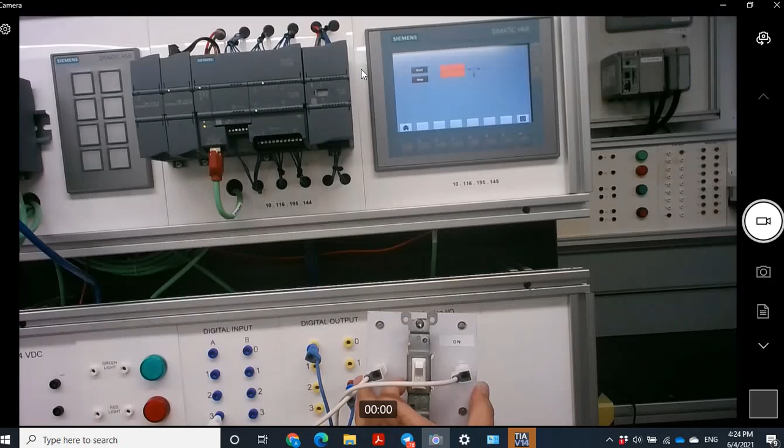And here, you see that when there's any overheat, I cannot turn it on. I push the start, but it doesn't turn on. But if there's not any overheat, then you can turn it on. Okay, good, beautiful. We can also do some minor modification at this point to make it more beautiful. So that's all.

This is a simple HMI, but the HMI gives you the ability to remove the switches, and it is very important because each switch is going to be connected to the inputs and outputs. If you can reduce the number of input output terminals that you need in the PLC, that reduces the number of input output cards to be added, and also wiring. All of them are costly.

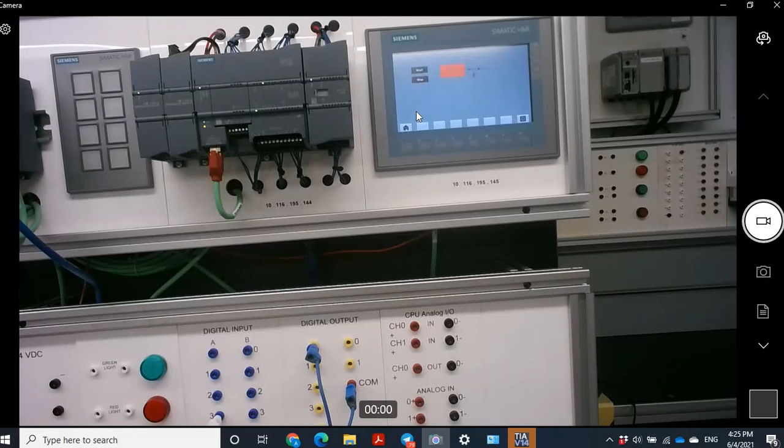Wiring is costly, switches are costly, and external input output cards have some cost. So by using an HMI, you not only have more flexibility but also reduce the cost. Of course, for a small scale project, maybe using an HMI is more expensive. But when you have a medium scale and larger scale project, this decrease in the price is significant. Okay, that's all.